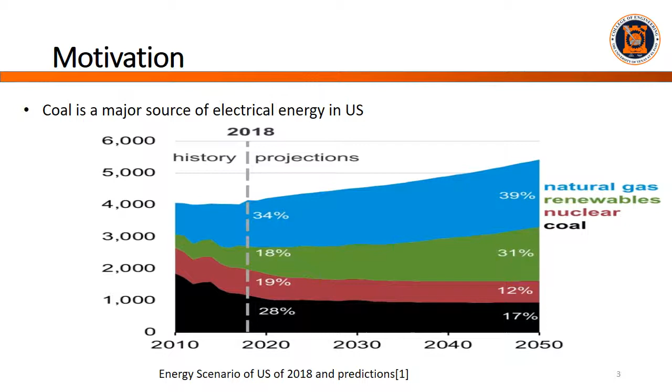However, coal produces a lot of greenhouse gas emissions, and when coal burns with air, it produces NOx and SOx, which are very harmful for the environment. So, another alternative to reducing the greenhouse gas emissions is burning coal with only oxygen. This eliminates the nitrogen and sulfur parts. We are left with only carbon dioxide and water vapor. This water vapor can be easily condensed and thus the carbon dioxide can be captured. A lot of research is being done into carbon capture units, but that is a whole different thing.

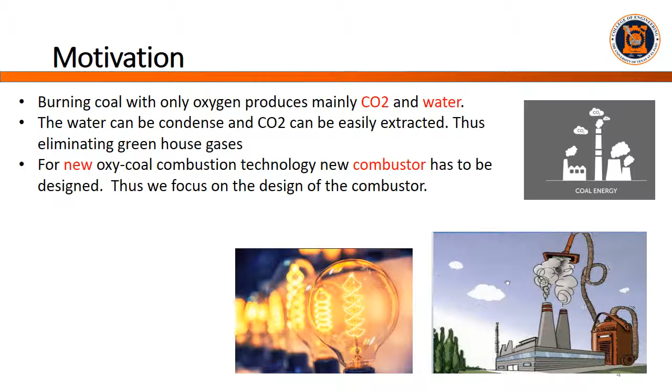So for this study, we will be developing a combustor and optimizing the combustor design for this new technology to produce clean coal energy. So the benefit would be that we will burn coal to produce electricity, however, it just won't hurt our environment.

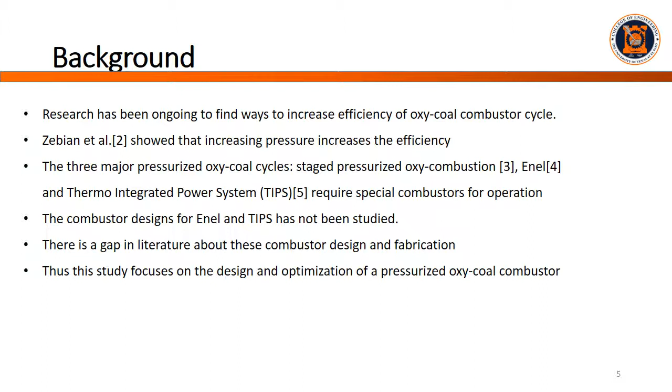As I was saying, a lot of research is being done in the sector, and Zebian et al. said that pressurization is the key to efficiency, and in this research field, there are three main cycles. These are staged pressurized oxy-combustion, thermo-integrated power system, and ENEL. ENEL is a patented design, a layout for this cycle. All of these cycles use pressurized combustion systems. However, there is a gap in literature because no clear designs are presented for these combustion processes. And that is where we get our motivation. We want to develop a combustor which can sustain the high pressures and high temperature needs of oxy-coal combustion.

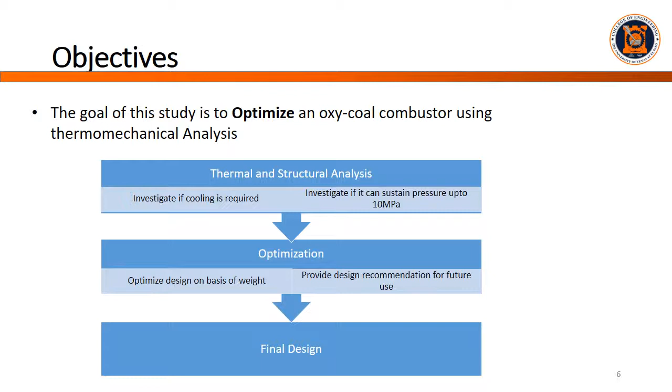Thus, the main goal of this project is to optimize a combustor design for operation in an oxy-coal environment, and to achieve that objective, we have some subtasks that we must follow. First of all, we will have to do a thermal and structural analysis. We will investigate if cooling is required, and we'll investigate if it can sustain up to 10 megapascals of pressure. If it can sustain all of those, we will try to optimize our design to reduce the weight, and on the basis of all our analysis, we want to provide some design recommendations for future use. Thus, we will have a final design and the final recommendations for future researchers.

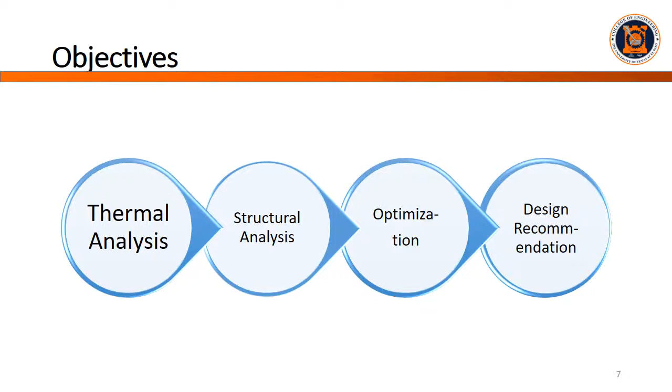So the flow of our design and of our research would be, we'll start with thermal analysis, we'll go to structural analysis, we'll do optimizations, and finally we'll have some design recommendations.

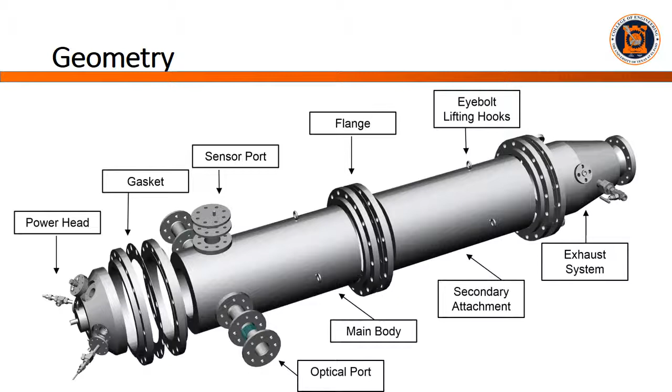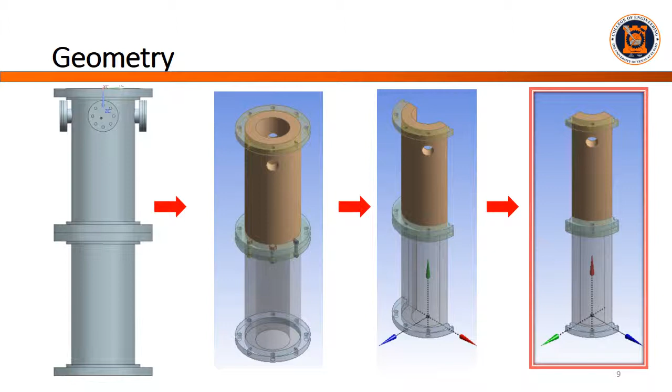So this is the geometry for our design. First, we start with the entire geometry. I've drawn this in ANSYS, and then we take a plane of symmetry through this axis, and again another plane of symmetry through this axis. Thus, we finally have a quarter of the combustor. It is a cylindrical combustor, so it fits into a beautiful pie shape, and this will represent our values and results for the entire combustor.

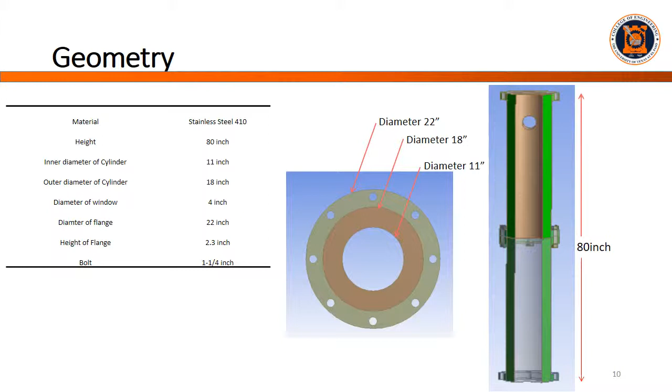So the entire combustor is 80 inches in height, and it is 18 inches in outer diameter and 11 inches in inner diameter. That means that the wall thickness is 3.5 inches on either side. Now, as I was saying, we have taken 1/4 symmetry, so we have symmetry along these two planes.

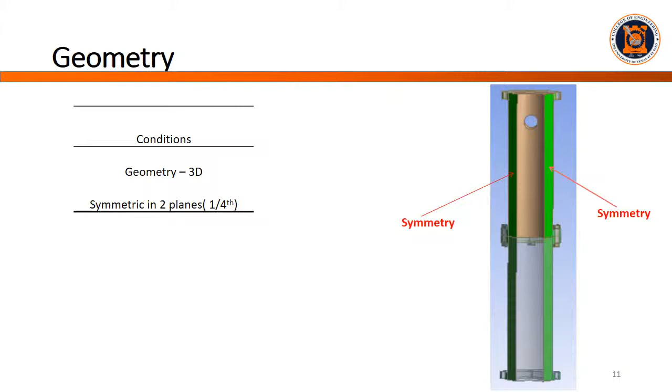For the boundary conditions, we have derived them using our design and using our objectives. We have applied frictionless supports on the symmetry planes, and we have applied displacement on the outer wall. For the inner wall, we have applied varying pressures.

So as you can see from this table, we have applied an increase in pressures in an interval of 30 seconds. So we start from 0 seconds and we go to highest of 300 seconds, and we have pressure fluctuations till 10 megapascals.

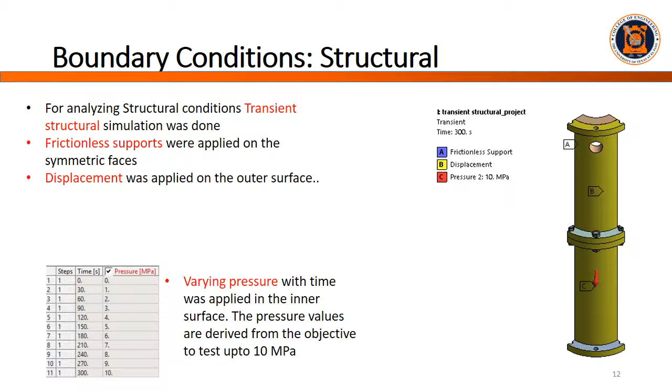Here is a closer look at our boundary conditions. As you can see, for our displacement, the body is free to move in x and z directions, and the movement in y is restricted. As you can see again, it is the frictionless supports, and the pressure is applied normally on the inner wall of the cylinder.

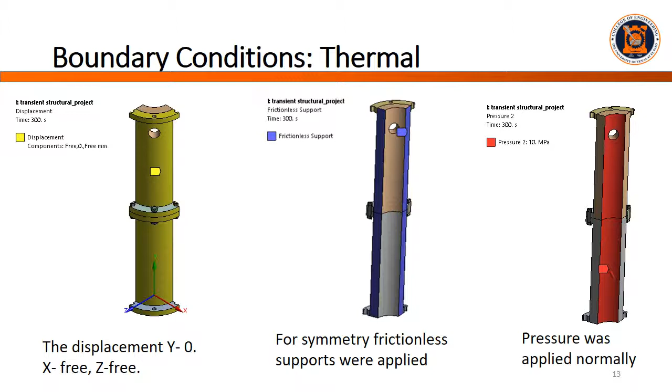For the thermal analysis, we have applied very complex boundary conditions. Now, these were very hard to find, so we went back to literature and we found the heat flux. We applied the heat flux on inner walls of the upper cylinder, and we applied convection on the lower wall and on the outer wall of the cylinder.

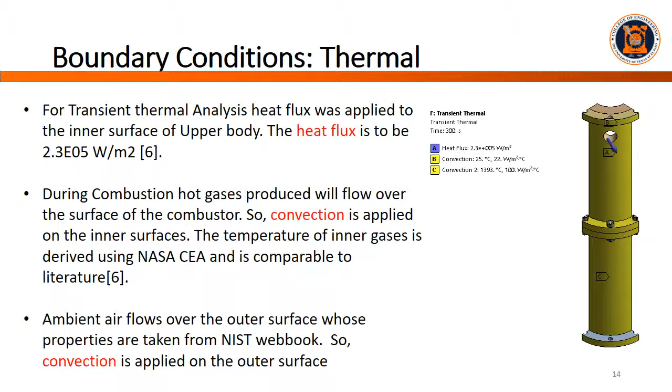So you can see that we have convection of ambient air on the outer wall, which is at 25 degrees Celsius. Now on the inner wall, we have a recirculation of hot flue gases. So we have applied convection on the inner walls. Now these conditions were derived from literature and using the NASA CEA to calculate our adiabatic flame temperatures.

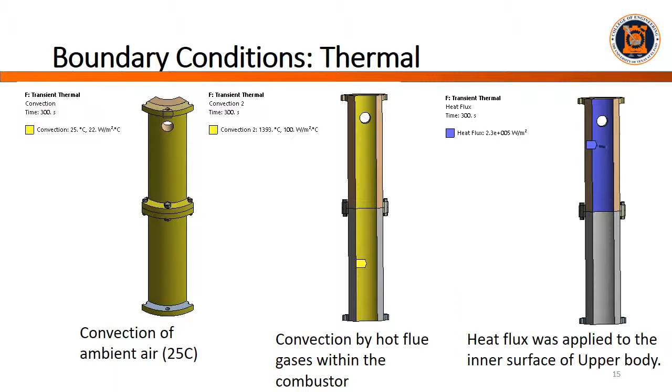Now for the heat flux, we have applied it only on the upper cylinder because it is what sees the heat generation, and on the lower cylinder there is only this convection.

So for the setup, we did some mesh optimization processing. We have started with adaptive method, which was the default one, and then I applied proximity and curvature because the body has a lot of curves. Then I refined the mesh to be medium and then fine, and then I applied multi-zones. And then finally, I started applying mesh sizing. Now, I applied from a default 30 to up to 5.

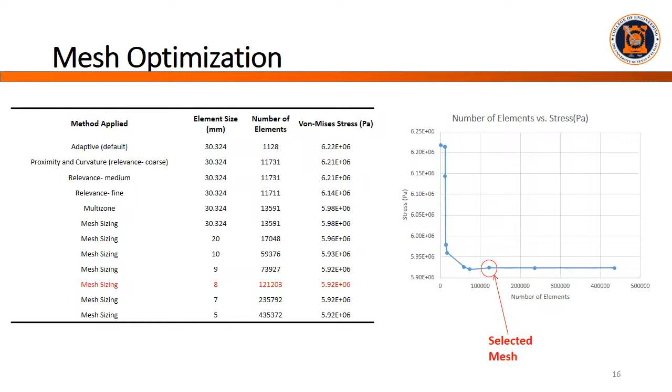As you can see, after 9, the von Mises stress kind of started becoming constant, and we have chosen the mesh sizing of 8, as you can see from the graph, that after this the values are kind of parallel and they're kind of stable. So we chose a default mesh sizing of 8 millimeters for our mesh.

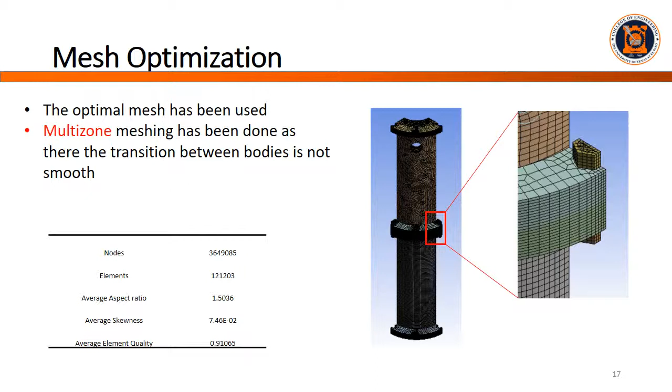This is a closer look at our mesh, and you can see all its properties are also listed on the tables. And for this, we have done multi-zone meshing because, again, there are lots of different parts, and we have also done mesh sizing.

So now let's come to the main section, the results. To obtain our results, we have done transient thermal analysis and transient structural analysis. Now these two analyses are separate, they're not coupled. I have done them separately because I wanted to see what our maximum temperatures are and what is the maximum duration that we can run our tests. And also from the structural one, we want to see what is the maximum stress and what is the maximum deformation.

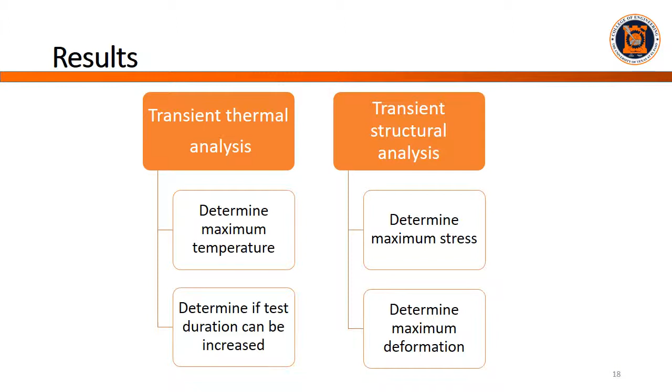Definitely, this analysis had to be transient because it is a very dynamic process, and we wanted to see the changes in different ratios and different parameters after 300 seconds.

This is the result for our transient structural analysis. Now I'm showing you the video. It is auto scale, so it's exaggerating it a lot, but we do see quite an increase in the stress. Now the stress concentrations are near the window. So the maximum stress is 58 megapascals, which is very low compared to our allowable stress, which is around 450 megapascals.

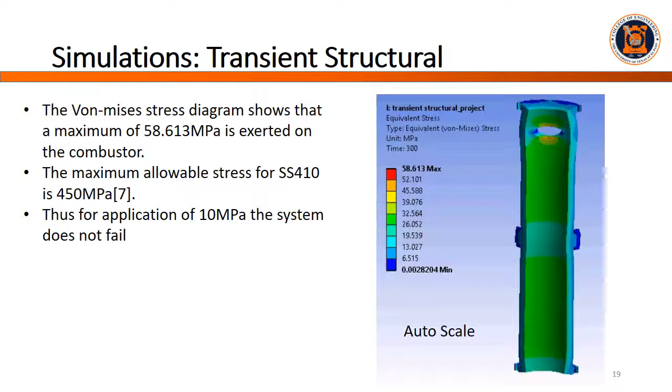So our design is good to go. It can sustain pressures. It is doing very well in terms of sustaining it. However, you can see that we have stress concentrations at the window. So we should do some steps to eliminate that.

Maybe we could do some fillets or chamfers at the window, and definitely the inserts that will go into the window have to be of the same material, otherwise you'll have a mismatch because that window is already a place of deformation and already a place where stress is building up.

And we can see on the outer wall also there is some stress on the window. And the flanges, though there are some contact surfaces with the bolts, they do not see much stress. They are quite stable and they are quite stationary. We don't have to worry about them.

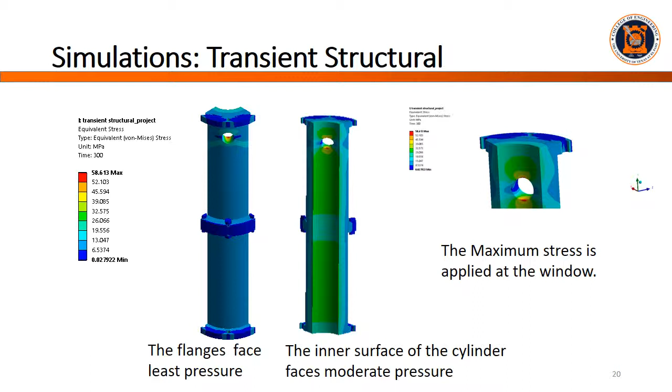Now comes the total deformations. For the total deformations, we can see that the maximum deformation is about 0.2 millimeters. However, this again is around the window, so we have to be really careful about designing the window. So we could eliminate the window; that would be the best option if we could do that. However, if we need the window for optical access, then we must be careful about stresses and deformations near the

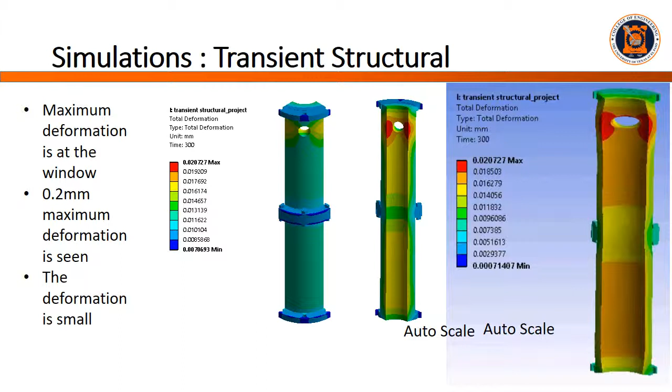window. Here also another thing to notice is that there is small or almost no deformation in the outer walls, so we should be good with this amount of deformations for 300 seconds. These are not something that worries us.

For the thermal simulations, we ran it also for 300 seconds. This was also a transient simulation, and you can see that from the ambient temperatures, the maximum temperature that we got is around 750 degrees Celsius. Now this is very low compared to our maximum allowable temperature, which is the melting point. However, this is only for 300 seconds, and so we must be careful for using it for longer

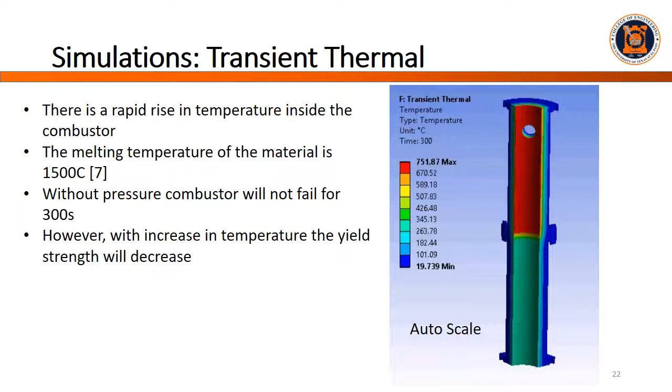periods of time. Now, as I had applied only the heat flux in the upper cylinder, the maximum deformations are around the upper cylinder, and the lower cylinder sees very little deformation. These are again close-ups of our results. You can see that the outer wall has almost no change of temperatures. All the temperature changes are within the inner cylinders and mostly within the first cylinder. So we will actually need cooling if we want to use it for longer periods of time, and we will need it in the upper cylinder.

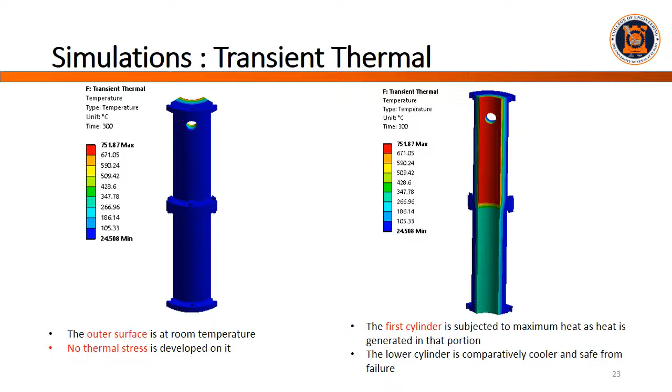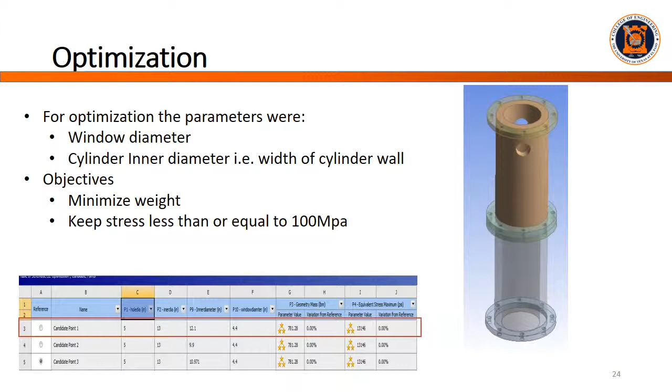Now, depending on all of those two designs, we did run some optimization operations on it. So for optimizations, we chose our parameters to be our cylinder inner diameter and our window diameter. And our objectives were to reduce the weight and to keep the stress less than 100 meg. So after running these optimizations, we ran quite a lot of design points.

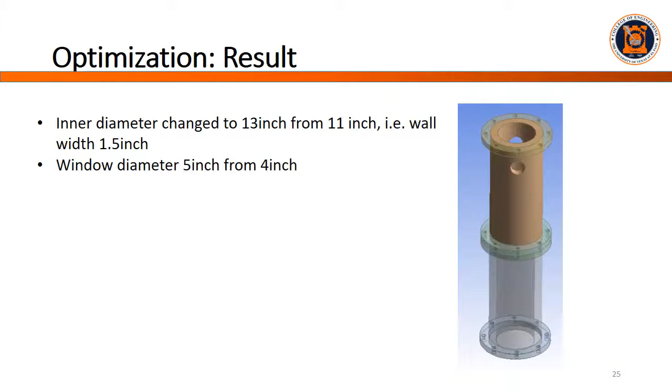What we got is that we can change our inner diameter from 11-inch to 13-inch. That means we can reduce it by 2 inches, and the final cylinder wall width would be 1.5 inches. And our window diameter would be 5 inches instead of 4 inches. So this is the results that we got from our optimization.

So we have seen that our combustor is safe for operations for 300 seconds. No cooling will need to be incorporated for 300 seconds. However, we have seen that the maximum temperature is 750, right? So if we want to run it for longer periods of time, if we want to implement a factor of safety, we must implement cooling. We must implement some cooling channels on the upper cylinder, so that we can run it for longer periods of time and we can run it safely. And the combustor also does not fail at 100 megapascals. So in terms of pressures, it is completely safe.

And depending on these two results, we have also done some optimizations, and the optimization came that we can reduce the wall thickness by 2 inches. And I would really love that, because having a heavier combustor always exposes to different problems of carrying it, of moving it in case of assembly, and a lot of other things.

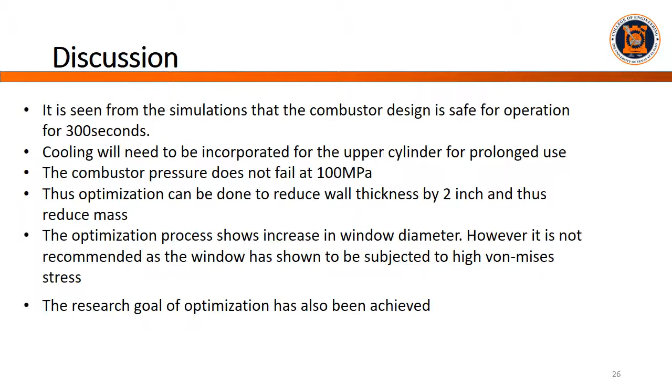And the other optimization suggestion was to increase the window diameter. This, however, I differ with, because we have seen from our structural analysis that the windows are places of maximum stress. So I would rather eliminate or decrease the window diameter if possible. So I would suggest that for future versions or future modifications, we need to incorporate cooling into our cylinder 1, and we must not increase our window diameters. Thus, the research goals of optimizations has been met.

So, in conclusion, we can say that our combustor can sustain temperatures and pressures for 300 seconds. It is safe to sustain 100 megapascals of pressures. We have also made some optimization recommendations. Therefore, the design of the oxy-coal combustor has been optimized on the basis of our analysis.

Now, for future work, we could definitely do some coupled simulations of temperatures and pressures. This would give us an idea of how it behaves interactively. We should refine the meshes further using maybe a professional license, and we could see how the different components behave if we refine them further. And we can also perform some analysis on the power head and on the exhaust systems, which I would recommend to be static structural or static thermal, because they do not see much fluctuations.